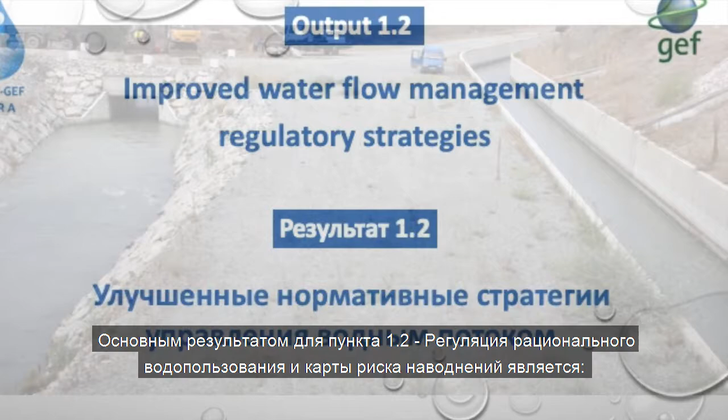The main deliverable for Output 1.2, Rational Water Use Regulation and Flood Risk Maps, is the Sectoral Water Management Practices Assessment for Supply and Demand for Improved Rational Water Use in each country, and National Flood Risk Management Plans for the Kura River Basin. Most of the work for this output has been completed.

The remaining work includes a 2-day training on flood risk management and scenario-based hydrological modeling to predict the impacts of implementing certain measures for rational water use in different sectors on water availability in the basin, to be completed by December 2020.

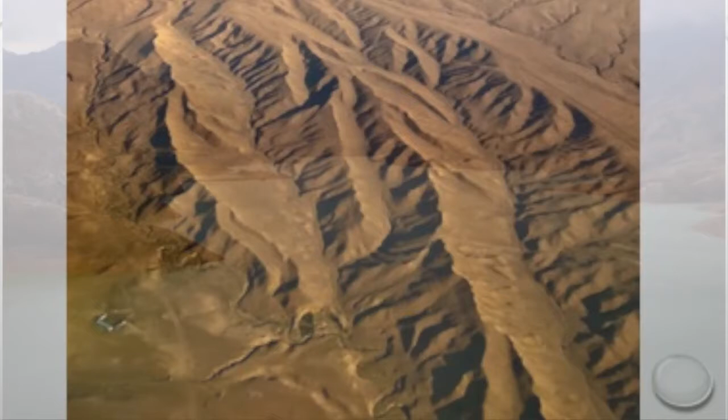After the project ends, the intersectoral approach to water resource management will serve to inform decision-making in both Azerbaijan and Georgia. Currently, we are experiencing a significant 7-year drought, and institutional measures for integrating rational water use are in extremely high demand, and the project guidance material will continue to support the governments in this direction.

Output 1.4, Pollution Abatement Plans. The final deliverable for Output 1.4 are pollution abatement plans for key sectors in each country, and an assessment of current permitting and enforcement systems with proposed strengthening measures.

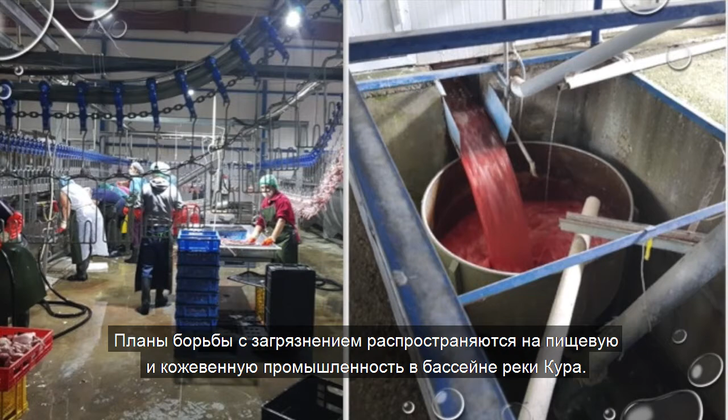The pollution abatement plans apply to the food and leather industries in the Kura Basin. These industries are significant polluters. The guidance produced here will serve both monitoring and enforcement agencies to better protect the water of the basin.

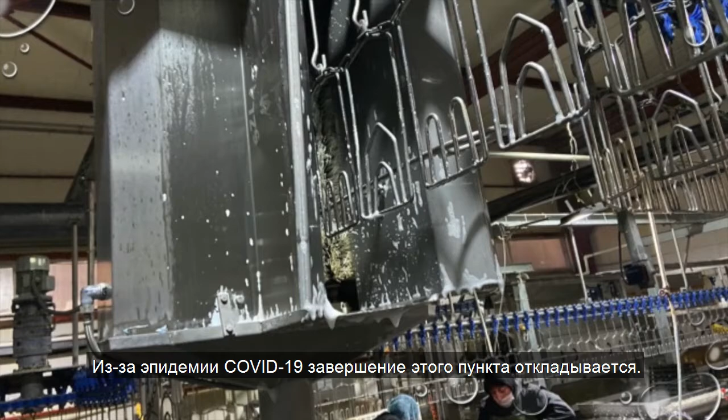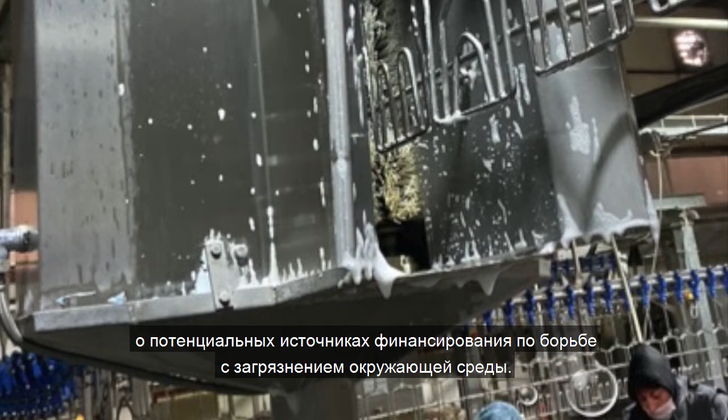Due to COVID-19, the completion of this deliverable is delayed and is tentatively planned to be completed in September 2020. This will include workshops and reports on potential financing sources for pollution abatement.

After the project ends, the materials developed will enable these industries to make strides towards mitigative actions, and may be assigned by the appropriate enforcement agencies.

Output 1.5, National and Regional Project Advisory Groups. The final delivery for Output 1.5 is national and regional project advisory groups functioning with project support and recommendations for sustainability post-project. The next round of national PAGs and regional working groups are tentatively scheduled for September 2020.

The final regional project advisory group meeting is tentatively scheduled for October 2020. While it was hoped that within the scope of the Kura II project a commission would be formed based on the signing of an agreement between Azerbaijan and Georgia based on the Helsinki Convention, at this time it does not seem likely.

However, as noted in the Lessons Learned presentation, alternative institutional mechanisms are under consideration where the regional and national working groups can continue the regional cooperation between the two countries.

This mechanism was tested during project implementation, and it showed successful results in fostering technical dialogue between the two countries on water resource management issues.

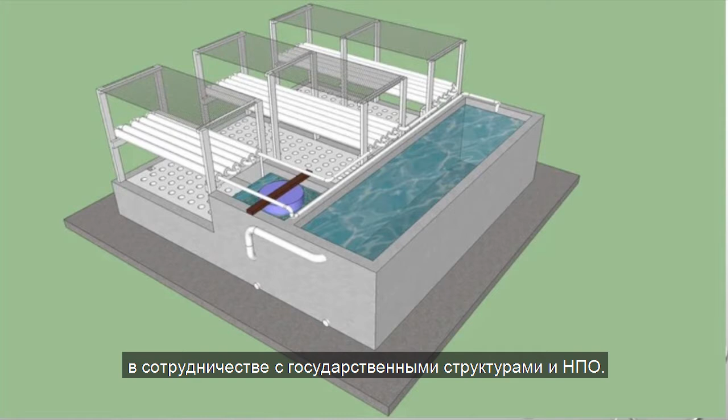This output will be handed over to the beneficiary ministries in collaboration with the appropriate national structures and NGOs. This includes web-based trainings on water conservation linked to the Kura Box, provided to the Ministries of Education, and promotional materials on rational water use in agriculture to Amelioration of Azerbaijan and the Amelioration Department of the Georgian Ministry of Environment Protection and Agriculture.

The responsibility for the aquaponics system and upkeep of the mobile app will be taken over by the NGO IDEA in Azerbaijan.

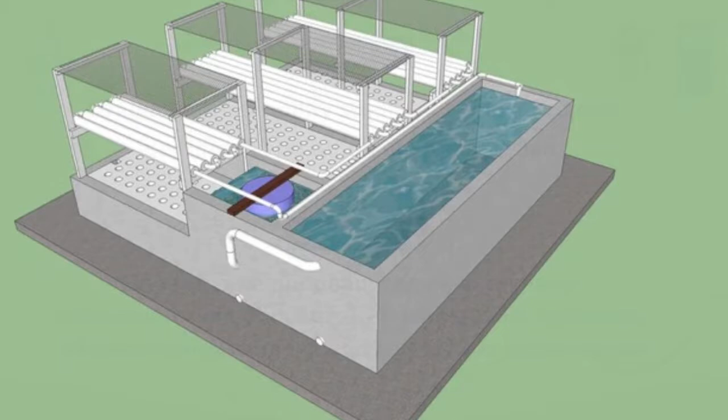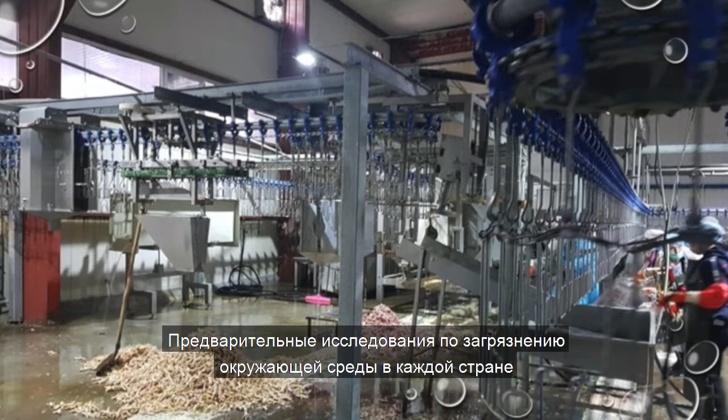Output 3.2 on Prefeasibility Studies for Pollution Abatement Plans. The target output for 3.2 is prefeasibility studies for pollution in each country, and a workshop with donors held for fundraising in each country. Currently, due to COVID-19, the final donor workshops have been put on hold tentatively until September 2020.

This includes final presentations to the government and a workshop for government, private sector, and interested international finance institutions to seek financial support for implementing these pollution abatement plans and to promote the use of cleaner production mechanisms and green technologies to reduce stresses on the river environment.

In line with the work for law enforcement capacity building and pollution abatement planning, the outputs here will be linked to ongoing improvements for monitoring and enforcement of evolving pollution abatement regulations in both Azerbaijan and Georgia. Enforcement agencies and the private sector will both benefit from continued access to all materials developed.

Output 3.3, River Restoration Projects. The final outputs are a constructed wetland to treat sewage water at Hajigabal Lake in Azerbaijan, and the Oxbow Lake and Floodplain Forest Restoration in Krtsanisi Park, Georgia.

For the Hajigabal constructed wetland, once construction works are finalized, the project will contract a local firm to provide operation and maintenance for the constructed wetland and purchase needed equipment, and we will provide training to workers to oversee routine maintenance for the duration of the project. This is critical in the first year of reed-bed growth for the sustainability of the constructed wetland functions.

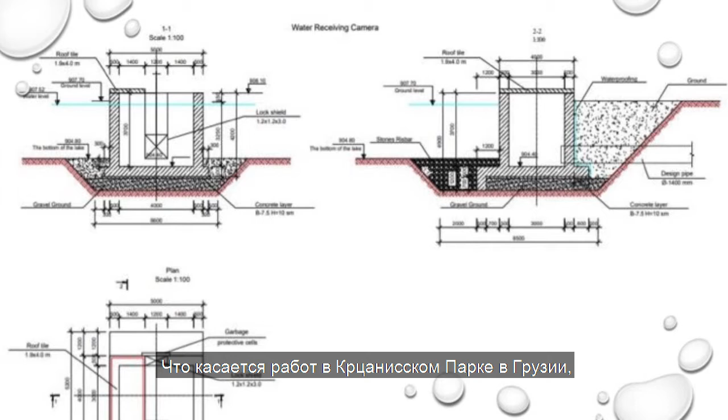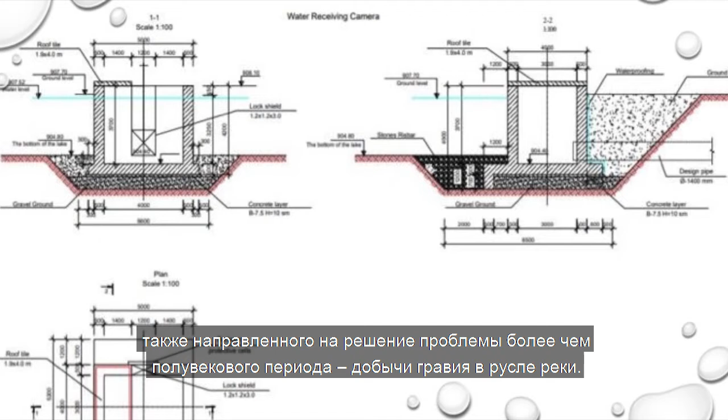For the work in Krtsanisi Park in Georgia, the international expert is currently developing a long-term river restoration plan to address more than half a century of gravel abstraction in the riverbed, which is impacting the drop in riverbed level and groundwater. This will be done with the Civil Engineering Department of Salerno University and will serve as guidance to the long-term restoration of this floodplain.

The second type of support from the project in Kura is the procurement and installation of a pump station intake structure and pipelines that will allow water to be diverted from the river into the Oxbow Lakes. As water levels in these shallow lakes increase, the lakes will join and reach their natural levels, with overflow returning to the river.

This will allow stagnant water currently in these Oxbow Lakes to be refreshed. Indigenous species of fish will be released into these lakes to increase the local wild populations.

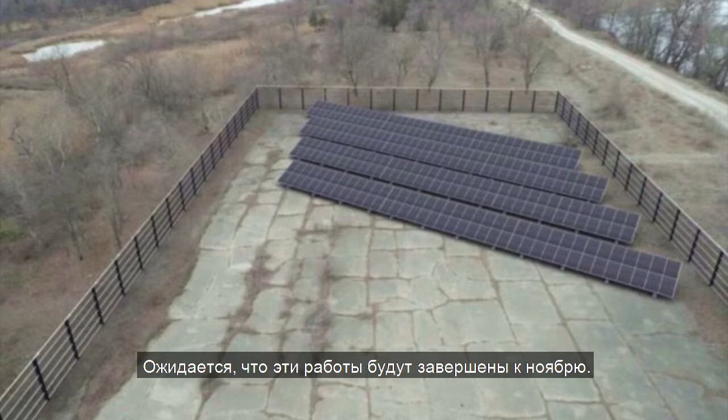The third type of support from the project will be the procurement and installation of a set of solar power panels to provide electrical power to the pump station for refilling the Oxbow Lakes. This rehabilitation is expected to be completed by November.

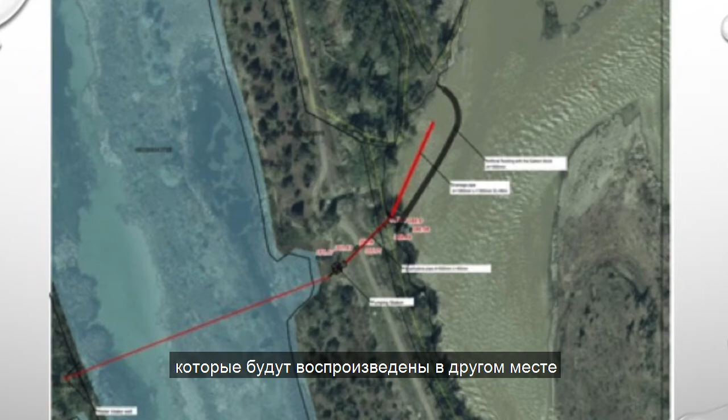The project team has ensured that handover of the project works will include a monitoring and evaluation plan for both river restoration projects. Additionally, the organizations assuming responsibility for these works post-project have incentives to keep them operational and to demonstrate the effectiveness of these nature-based solutions so they can be replicated elsewhere. Please note that all dates in Component 3 may shift based on the evolving COVID-19 situation.

Component 4: Stakeholder Education, Awareness, and Empowerment.

Output 4.1: a team of diverse professional IWRM trainers to work with stakeholders. The project has largely completed the 8 stakeholder trainings held in both countries and is preparing the capacity building materials to be shared online as the final deliverable for Output 4.1.

Additional trainings for journalists and parliamentarians will depend on COVID-19, though these may be developed as online courses depending on the duration of the quarantines. All public awareness training materials are planned to be available in national languages online on the project webpage by October 2020.

Output Sustainability Post-Project: public awareness of their role in water management issues will remain an ongoing priority for both countries, especially with the current drought.

The materials developed under the Kura II Project can serve as an important basis for improving understanding, and the trainings conducted will be available online with the IWRM Academy outlined in Component 2 above. This will include trainings related to gender mainstreaming in water management, civil society in water management, and trainings for farmers on water conservation.

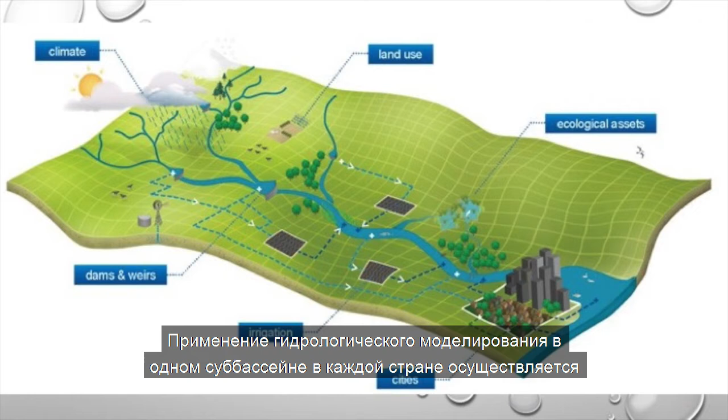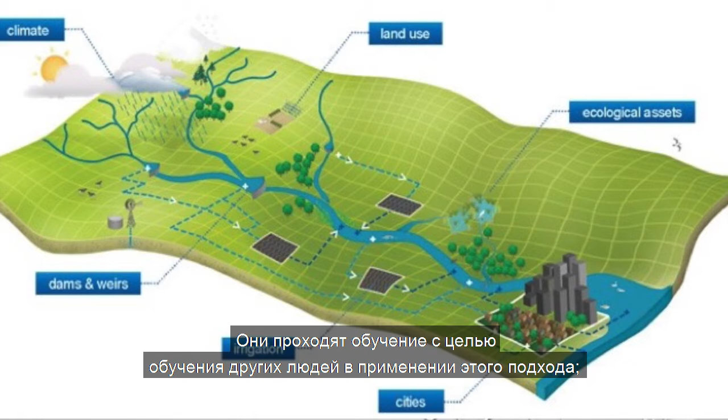The application of the hydrological modeling in one sub-basin in each country is being conducted by teams of national experts under direct supervision of the International Expert for Water Supply and Demand. These teams will gain the experience to set up the model in other subbasins and analyze its results to support decision-making processes. These trainees are being trained to train others in the application of this approach, and outcomes, scenarios, and recommendations reports will be developed by December 2020.

Output 5.2, an assessment of the economic and social benefits per unit of water used in the different sectors. Economic valuation of water services per unit of water was calculated for hydropower, municipal, and agricultural sectors in each country, and trainings on WEAP economic modeling for water management is key deliverable for Output 5.2 and have been completed during the year 2019 and early 2020.

The dissemination of the project economic reports and training materials created momentum to incorporate economic dimensions in water resource management in both Azerbaijan and Georgia. The project economic analysis reports encourage the two countries to start using these economic tools for rational water use.

The Georgian Amelioration Company is preparing a new tariff structure for its water services based on one of the project output reports. Also, the project was approached by the Azerbaijan Ministry of Ecology and Natural Resources to provide support in establishing a new differentiated tariff for water use in different sectors roadmap. This report will be ready by mid-August 2020.

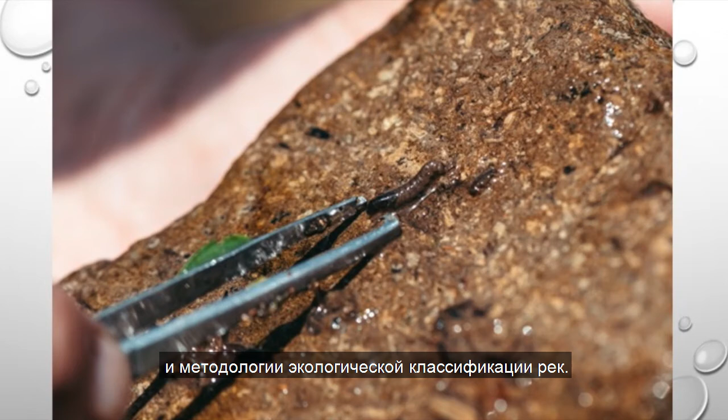This populated database for regional use will support the implementation of an updated river ecological classification structure and methodology. The final report on river system ecology will be based on an assessment in the eFlow studies by February 2021.

The project prepared the guideline for 2-year plans for ecological monitoring. This guideline has been tested during the collection of the ecological data for the environmental flow study. This guideline, together with the databases of the ecological data collected by the project teams, will be handed over to the national focal point in each country to continue monitoring the ecological status in other river basins.

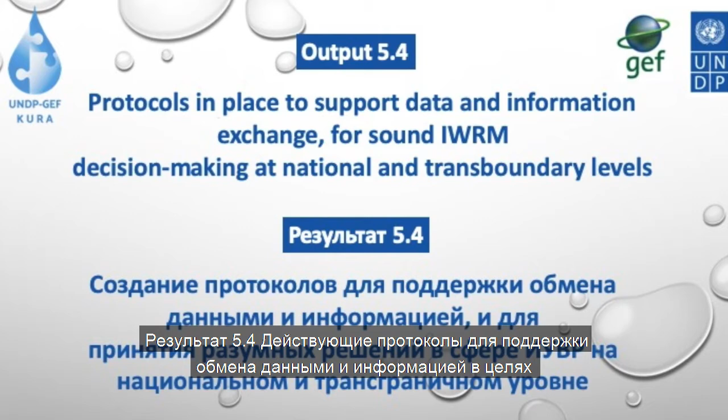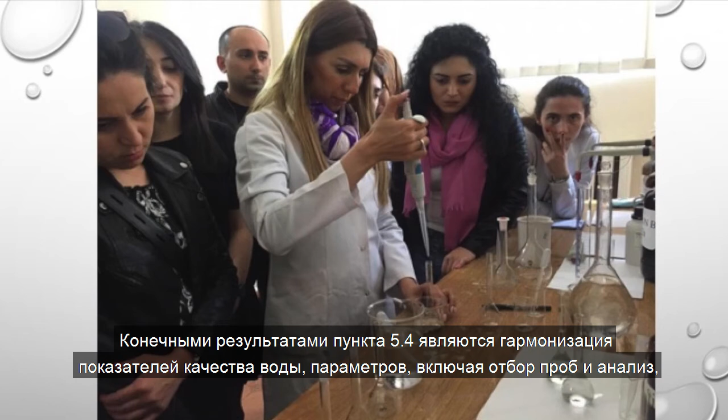Output 5.4, protocols in place to support data and information exchange for sound IWRM decision-making at national and transboundary levels. The final deliverables for Output 5.4 are harmonization of water quality indicators, parameters, including sampling and analysis, and laboratory standards operating procedures, all to be in line with the international standards ISO 17025.

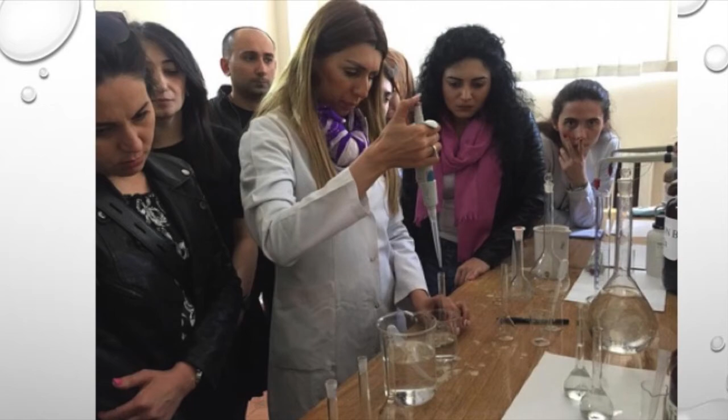To achieve this, we will support the exchange of expertise training on the analysis of pesticides for the water lab staff in Azerbaijan by a Georgian chemist from NEA in August 2020, hold the 5th meeting for the 2 regional working groups for water quality and water quantity in September, update the State of the Kura River report by December, and finalize the report on shared water quality indicators by February 2021.

The project is currently discussing with members of the 2 regional working groups in water quantity and water quality the mechanisms for sustainability of their collaborative work after the project support will end.

The project purchased all teleconferencing equipment for the 2 countries to be used during the project trainings. This equipment will be handed over to the beneficiary ministry in each country in November 2020. This equipment can be used to organize future virtual meetings for the members of these two working groups to continue exchanging knowledge and share information on the water quantity and water quality issues.